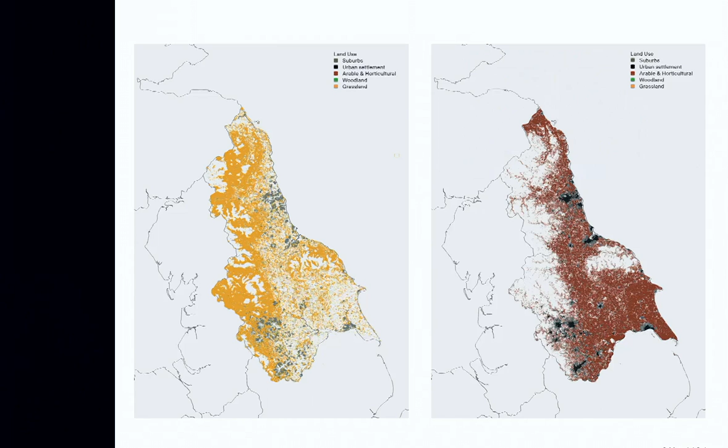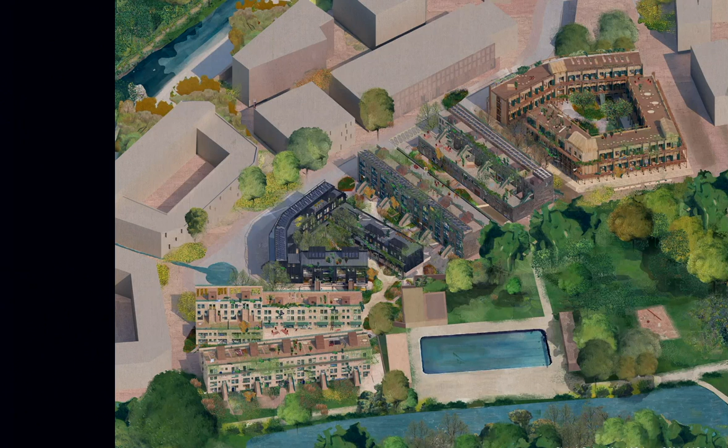We also carry out research, thinking strategically about how these ideas could be applied at scale as we move towards the circular economy, but also more regenerative land management practices. We try to work laterally across different scales, so working on large-scale housing developments and prototypes, down to the kind of one-to-one and the built fragment.

And we do this sort of hands-on work, either as part of our own research or working with our students, looking into the relationship between materials and eco-regions. We also teach across different institutions. We teach architecture, but increasingly we're broadening our remit within education into construction skills, and for this we set up a platform called Make, and through Make we're trying to increase access to an understanding of how to work with natural materials. We recently published a book called Material Reform, which I'll be talking about later on today downstairs.

So I'm going to talk about our work now through three different types of landscapes: through the farmland, principally through design, through forests and thinking about research, and through the wetland, thinking about imagination and education.

So we work a lot with straw. It's very good - it's a stem of cereal crops. It's very versatile, and it sequesters about 42% of its matter as carbon. So when you leave it in the field or use it for bedding or burn it, the carbon dioxide is obviously returned back to the atmosphere. But by taking plant matter from our fields and using it in buildings, and using it to substitute the materials which we have come to think of as the status quo, plant-based buildings can be thought of as kind of carbon batteries.

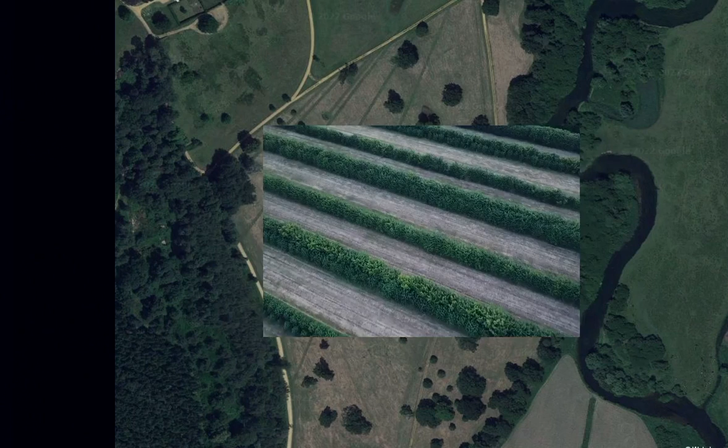We've been learning from farms like this one in Suffolk. They grow in alleyways, so they have rich verges alongside the edges of the crops, and they cultivate population species of grain and diversify and bring resilience to the ecological system by doing that.

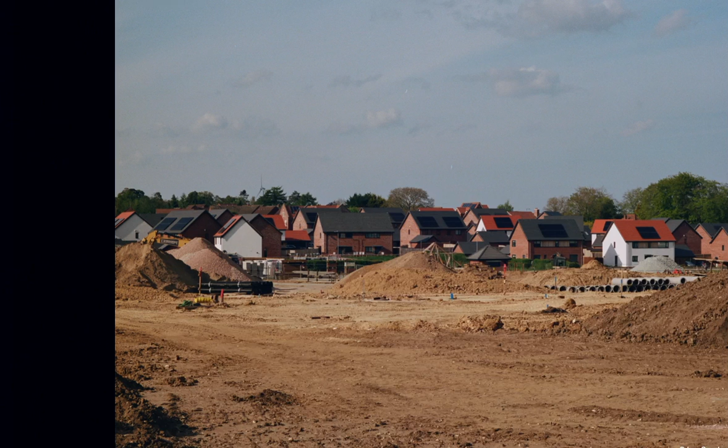A parallel story could also be told about the impact of oil on architecture and the loss of vernacular practices that were inherently low carbon, low impact and bioregional. Essentially, the way we used to work was about gathering up what you had around you, and that has now been substituted by a system where we draw from global, very energy-heavy supply chains.

Contemporary construction materials like steel and reinforced concrete align with the patriarchal masculinity of modernism. They are hard, they are immutable, they are easy to count, and they have the illusion of not needing any care. Inversely, perhaps part of the reason natural materials became denigrated is that they align with the feminine - they are soft and mutable, and they are inviting of careful maintenance and repair.

Natural materials perform in ways that are attuned to human occupation. They have inherent richness, they breathe, and they contain compounds that are antifungal or antimicrobial.

The history of vernacular architecture is a history of thousands of years of technological development, of research, of testing, of regionally and climatically specific adaptation to material systems. But much of this material technology has already been lost, and the knowledge that remains is in the hands of very few people.

So rebuilding a relationship to repair also requires human investment and different sets of relationships to place and territory, and the formation of new cultures.

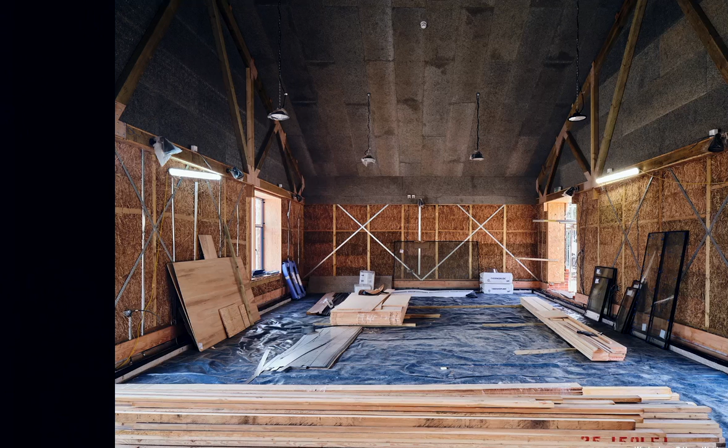The straw bales are very deep, so they create reveals, and we alternate the glazing in these reveals, making places to sit inside and also outside the building. The buildings, the way they're configured, form a series of courtyards, moving from more public facing to more private, depending on the operations of the food growing community.

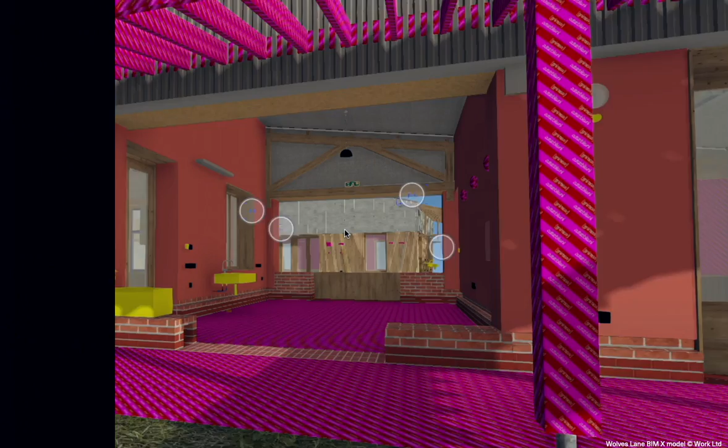Our contractor on the project, Work Limited, took our 3D model of the building and developed a digital twin, detailing down to the fixings, every single plumbing junction, all of the conduit for the wiring - which meant they could order everything with extraordinary precision.

For us, it was an exciting kind of transgression, really, bringing the straw bale into the digital world and trying to work with it in contemporary ways.

The buildings were designed to be a tool for learning and communicating the value of plant-based materials. The project is rooted in principles of social justice, creating spaces to practice and grow and learn for historically marginalised communities in London.

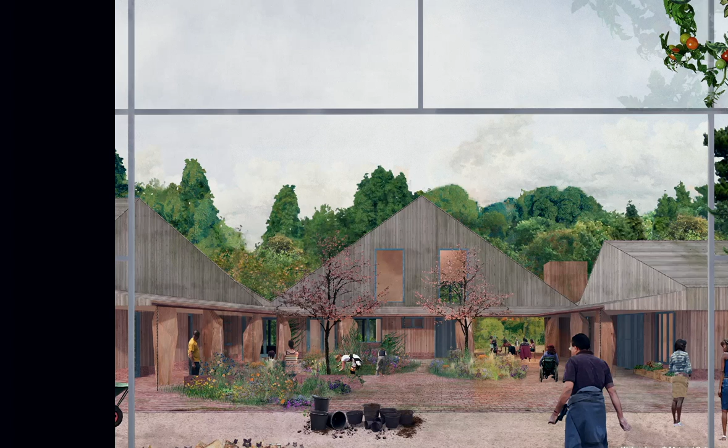Places like Wolves Lane are increasingly important as places from which to build community, knowledge, enterprise and leadership. We developed for the project a participatory construction framework of apprenticeships, skills courses and volunteer sessions, so the building's been host to all sorts of forms of learning all the way through its construction.

Direct contact with and understanding of materials and what they feel like is at the heart of material cultures and how we design and how we build.

On a small farm in Cambridgeshire, our client Steve Barron established an organisation called Margent Farm, where he looked at growing hemp for use in experimental biocomposites and alternatives to plastics. He commissioned us to do a project called Flat House, which is a hemp-based flat pack demonstrator house that could show the versatility of hemp.

The building takes the form of the existing steel barn that was on the site, retaining part of the structure to support a glazed hothouse and a climbing frame for plants. So a new crop of hemp was sown.

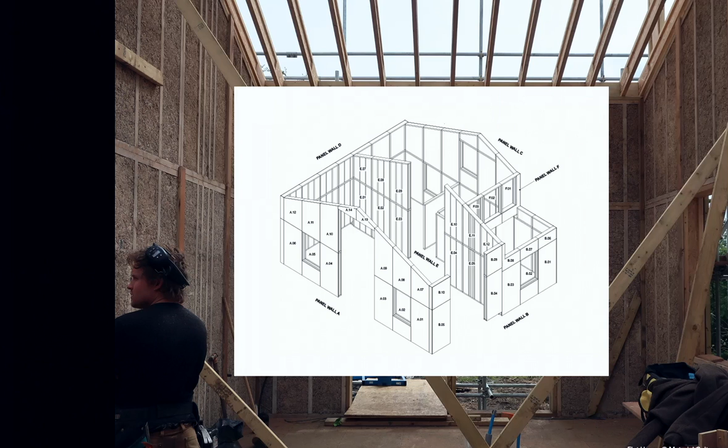The harvested plant has extraordinary benefits for soil because of its very deep tap roots. It was then transported around the UK—first to Yorkshire to separate the fibre from the stem, then to Buckinghamshire where it was combined with lime and cast into panels as hempcrete. We developed the system with Will Stanwix and Oscar Cooper, and the building was erected by our long-term collaborator Henry Stringer.

Alongside the hempcrete inside the building, a cladding material was developed specially for the project, combining fibre from the hemp plant with a sugar-based bioresin to make a corrugated rain screen cladding, which looks much like the one you see across most agricultural buildings.

Inside, the spaces shift between scales, working between highly intimate ones and large, open, spacious living areas. Working with natural materials in a direct way allows the materials to be used to hold the space and give it character.

In designing, we have to admit we constantly navigate the compromises and contradictions of working within highly complex and industrialised supply chains. It's important for us that you see this in the building, and that the material choices we make are evident.

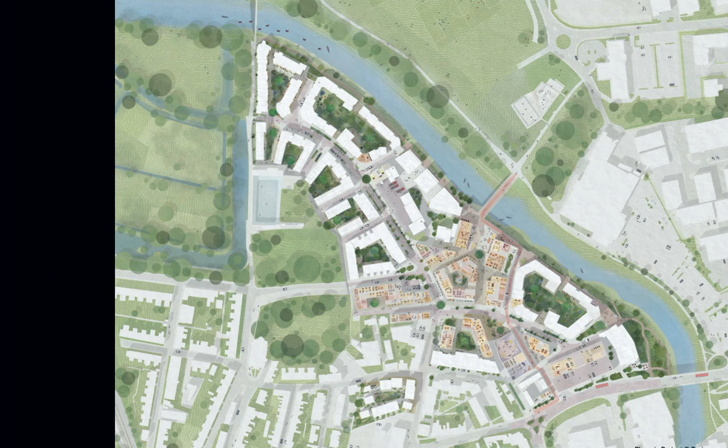More recently, we've been working to scale up the principles from Flat House on an ex-industrial site in Sussex on the south coast of the UK. We've been working with a developer called Human Nature to deliver part of a 700-home mixed-use development.

We've been contributing to the broader material and construction strategy, and also developing the design for 70 homes, which form a dense urban configuration arranged to create shared courtyards along pedestrianised streets.

The unit typologies are varied and designed to be generous, but are mostly based on the principles of the traditional terraced house found across the UK.

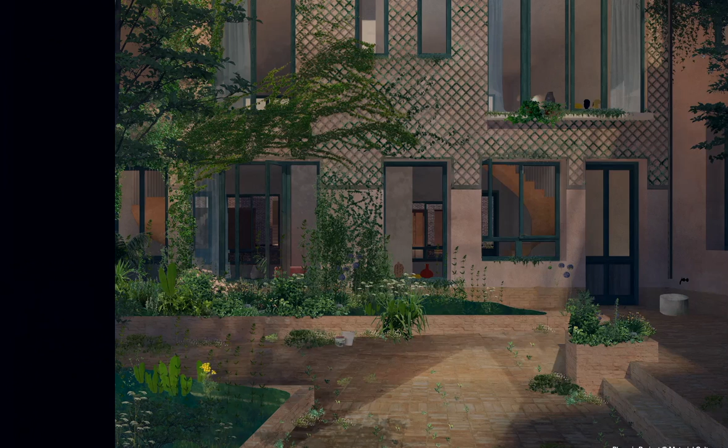We think the project demonstrates what's possible once you start working at a larger scale, presenting the opportunity to build a genuine alliance between sectors, working directly with foresters and farmers to establish supply chains. Large-scale developments are critical to producing scales of efficiency that reduce the cost of materials, but can also fast-track supply chain development.

So, moving into the forest: for our structures, we look to timber, and then to the woodlands in which trees are grown.

Woodlands are a critical habitat for biodiversity and ecosystem restoration, but they're also intertwined with a history, particularly in the UK, of our common lands—ones we've largely lost access to. We used to be able to source multiple materials from woodlands, generating different income streams. But today, most woodlands are privately owned, we have limited access to them, and they're actually in very poor ecological health.

Converting agricultural land to woodland is increasingly talked of, but it can also be seen as the beginning of offshoring deforestation—plantation development in one place leading to deforestation and carbon costs elsewhere. There's a critical relationship between farming, deforestation, and woodland creation, and as we advocate for change in how we build, it's important to remember the increasing tensions in how we use our land.

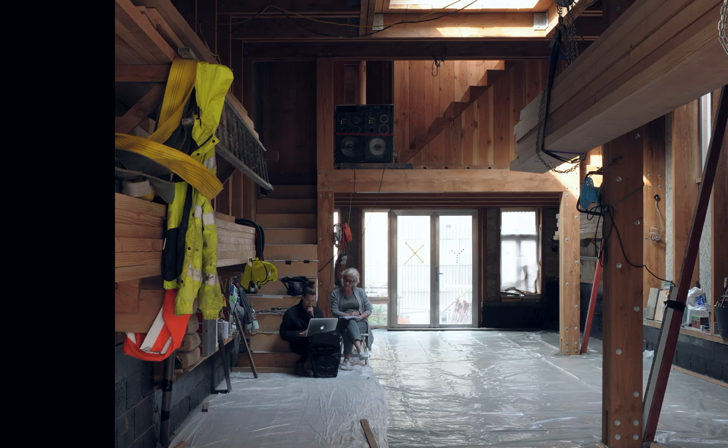As a self-build, the project is in many ways still ongoing. It's a story of homeowner agency, of continued care and maintenance and renewal.

It's a monolithic 3-storey timber and hempcrete building, and it has a textiles workshop and 2 apartments in it, and a raised external courtyard. It's very flexible and can operate as a series of interdependent or independent units.

In this project, we cast the hempcrete in situ, so you get shuttered board lift lines like you do with fair-face concrete, but much warmer and softer.

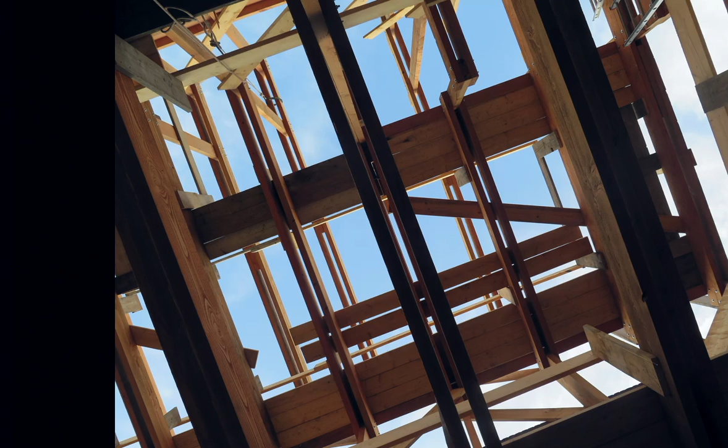The design approach in this project was intended to use carbon sequestering materials in ways which used simple and robust detailing to maximum effect. So actually the frame, the floors, the skirting boards, the whole project was made with one single section of Douglas fir timber of the same size, all sourced from one mill in Salisbury.

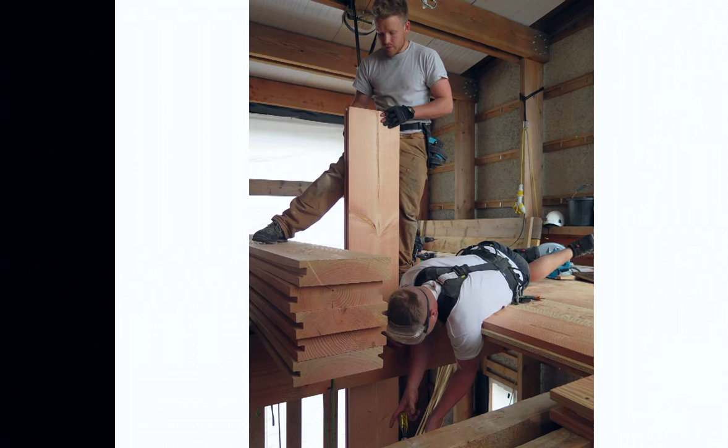And we oversized the sections to allow for charring, so we didn't need to use intumescent coatings to protect the building from fire. And because the section size is so large, we had a very wide portal frame, about 1.2 metre column centres, and then the floorboard spanned about 1 metre.

But then ultimately that means the primary materials perform multiple functions. So they act structurally, but they also provide acoustic insulation, thermal insulation, fire resistance between floors. And so we needed to use less alternate materials.

We have, for example, no soffit. And the building celebrates the materials from which it's made, giving it a richness of character.

And that the primary materials are close at hand also means that it's easy to adapt them, to maintain them, and to rework them. And equally, because it's so simple to put together, it's simple to take apart.

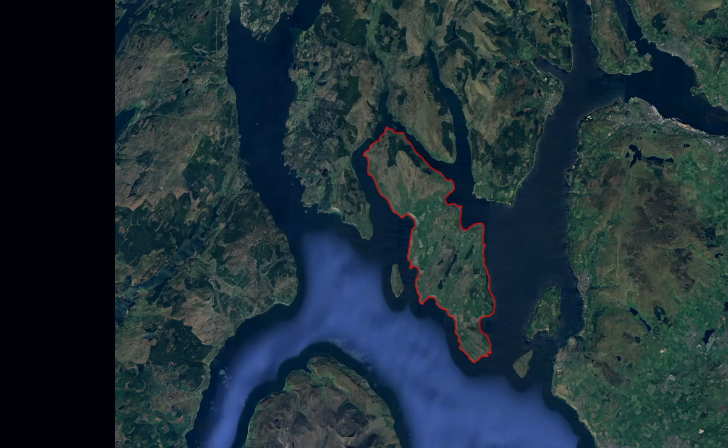And whilst we found that actually there are quite good supply chains for timber around the south of the UK, around London, on this project we've been working on more recently in the Isle of Bute in Scotland, the conditions for milling and sourcing timber are very different, although actually Scotland holds most of the UK's timber stocks.

Bute itself is now entirely a farming landscape. It used to have a very precious temperate ecosystem, a rainforest on most of the island, but you can see just about what's left of it is the kind of shadow on the northern corner of the island.

We've been working on a site surrounded fully by industrial farming to refurbish an old steading building, which has been left derelict for decades, the steading being the kind of vernacular farm typology you get in this area.

When we started the project, the first thing we had to do was take off the existing timber structure. The slates on the roof had fallen in and the timber was rotting.

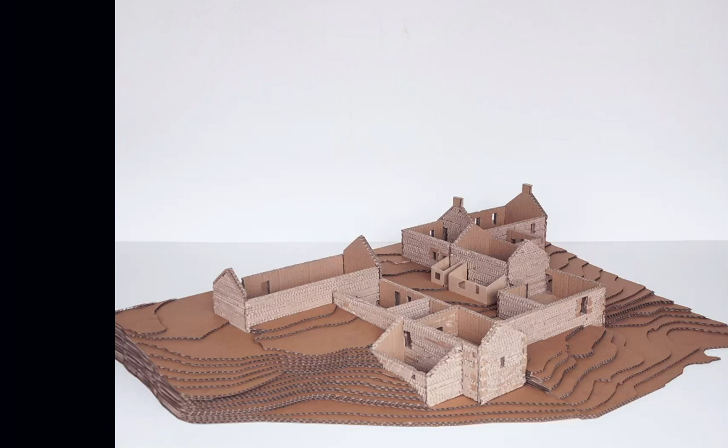What this left us with was a series of very wet stone walls, which are actually quite hard to work with if you're trying to introduce bio-based materials. The first thing we had to do was dry them out fully so they could then be lime rendered again to protect them from the elements, because it's very close to the sea.

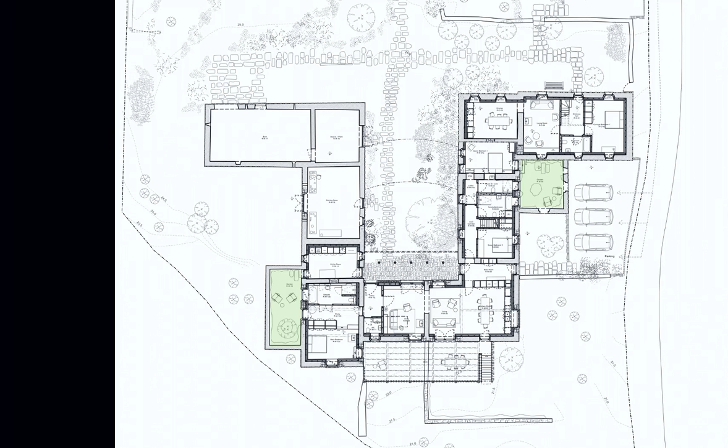Ultimately, the plan we've been working with is very simple, creating two independent dwellings, keeping some of the stone rooms unroofed as kind of gardens, which are appendages to the house, making spaces sheltered from the very strong offshore winds.

We worked with a landscape architect called Jane L. Gibbons, who designed the landscape around the house using the temperate rainforest plants native to the island. And the porch is a series of timber columns, which carry oversized slate eaves.

We lifted the eastern wing of the building to introduce a new mirrored gable, which gives the kitchen and living room very generous head height.

Where we can, we're working with the existing stone on site to rebuild the walls. This has been an incredibly slow process, I have to say - very interesting, but very slow.

We have an excellent building surveyor, called Kinley Laidlaw, and his understanding of historic buildings and consideration of how the work is planned has extended to visiting all the beaches on the island to find the exact beach where the shells come from that were used to make the original lime mortars, which is the traditional process used before.

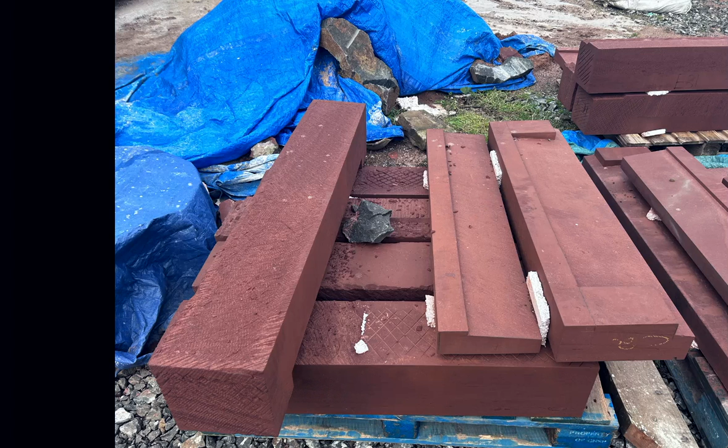But he also works to plan how the masonry work happens on site, which has been really important learning for us, so that the work for the masons isn't repetitive or dull. He breaks up the tasks and does a plan of work, which means you cycle through alternate tasks rather than doing all the dressing in one day.

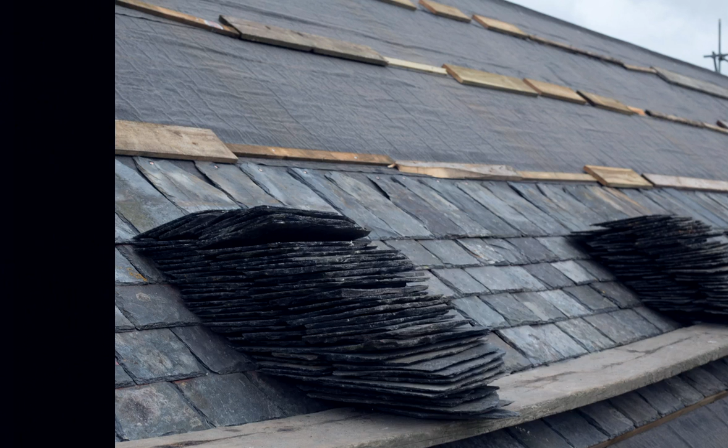Our roofer, Hector Whitelaw, has been reusing the old slates to rebuild a new roof. And where we've been bringing in new materials, we use wood fibre insulation, wood wall boards, and clay plasters.

Much like the many aristocratic estates across the UK, the private woodlands of the estate of the Marquis of Bute - the kind of landed gentry of the island - are standing still today, not because they're native ecosystems, but quite the opposite. They are a portrait of a colonial history, and host a series of cultivated specimen trees.

We've been working with the estate managers on the island. There's one sawmill trying to resist the pull to import timber from much further away on the mainland to build a new roof. There's also plantation woodland on the island.

There's also storm-managed felling, but most of the plantation woodland is actually used for firewood. And they have a very small management team at the mill.

They're very nice, very sweet and very friendly, but they have no in-house structural grading capacity. This is a portrait of what milling is like in the UK, actually - it's been fully centralised into large mills that are quite far apart.

So for this project, our engineer trained specifically in the capacity to visually grade the timber so that we could work with the trees that were nearby.

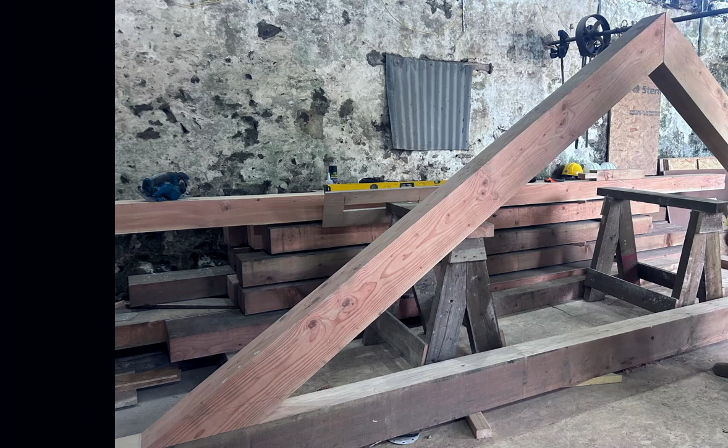But on a small island like Bute, it's massively depleted in its industry and population. It has a population of about 7,000 people. Supporting the kind of growing industries is a critical way of moving towards more sustainable supply chains.

But as I've said, it involves very complex processes which, without the support from policy, are very expensive. It also involves us thinking differently about the role of the architect in the future.

And finally, I'm just going to talk very quickly. My last forest project is one we've been working on in Yorkshire for a long time with the Forestry Commission and Forestry England.

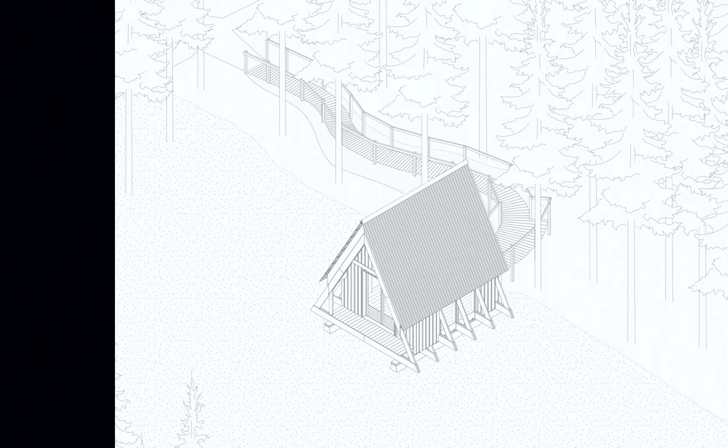Working with a group of students from Central St Martin's School of Architecture, 30 master's students, to think about the construction process of a timber building as a pedagogic tool.

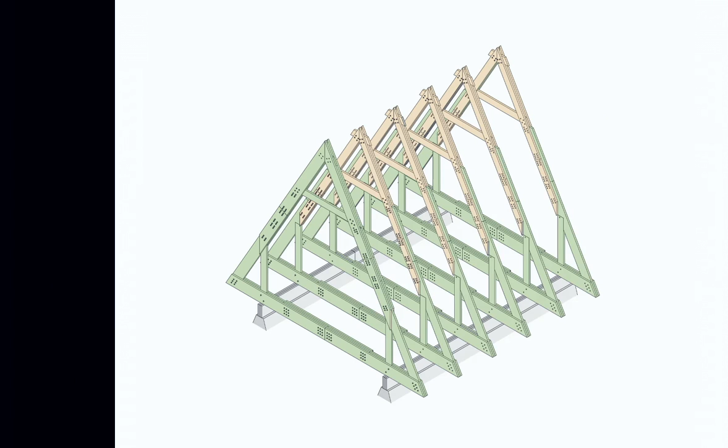In this project we've been thinking specifically about the limitations of British forestry. We designed a building which works with two species of timber, ash and larch, which today are affected by pandemics, exacerbated by global warming. You can see them in green and orange, showing how you mix timber species in a structure, not just as a whole but within a single structural component.

And then working within the limits of what you can actually grow within British woodland, so we have shorter trees, shorter lengths of timber section. The project as a whole is a kind of portrait of things we make today from British woodlands in Europe, but also many materials which we don't make in the UK, like wood fibre insulation, but could, with a growing manufacturing base, make ourselves.

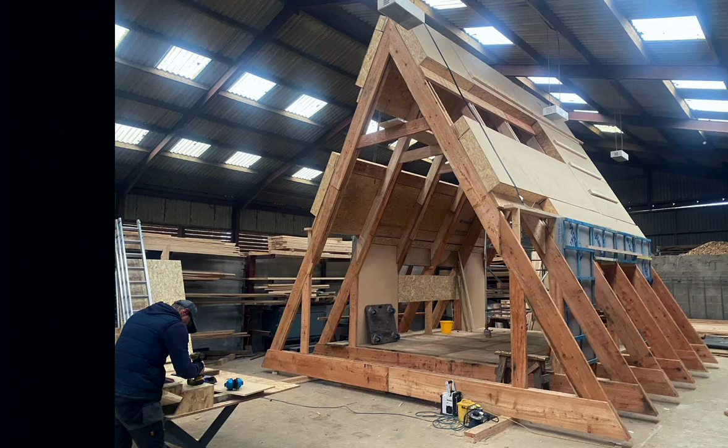The project was prefabricated in very small workshops in London by a team of about 15 students, and then it was dry fit in our contractor's workshops in Yorkshire, called Yorkshire Oak, and it's ready to be erected on site in about two weeks.

The final landscape I'm going to talk about today is the wetland, because we've recently started looking at wetlands as a landscape of potential, and also a site for imagination and a springboard for conversations about what a future regenerative landscape might look like.

Swamps, marshes, fens and wetlands were historically identified as areas of mystery, places of threat. They were wastelands, articulated as places with no inherent benefit to human populations. They are obviously critical ecosystems, stopovers for migrating birds, carbon sinks, and buffers against sea flooding. But they were considered landscapes of untamed nature that needed to be transformed into farming landscape, productive grain fields that could be controlled.

A common misconception is that civilization started in arid settings which were then irrigated to grow crops. But actually, human civilizations first settled in wetlands. They have very little written record because everything was perishable, and it was an oral culture. Equally, the building materials perished, so there's not a wealth of archaeological record about this. Ultimately, those civilizations have been claimed by water and soil and time, and until recently this has remained invisible.

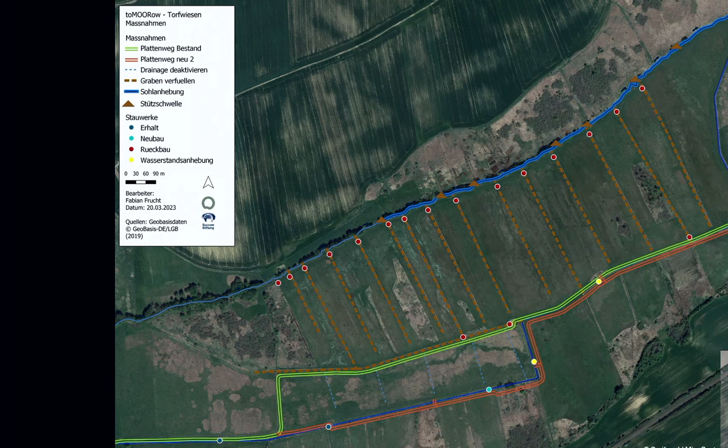Because it's important to think that when we flood a wetland, ultimately the agricultural practices over the last decades have to be replaced, and so there are communities there who've been working and their livelihoods are being threatened by these processes.

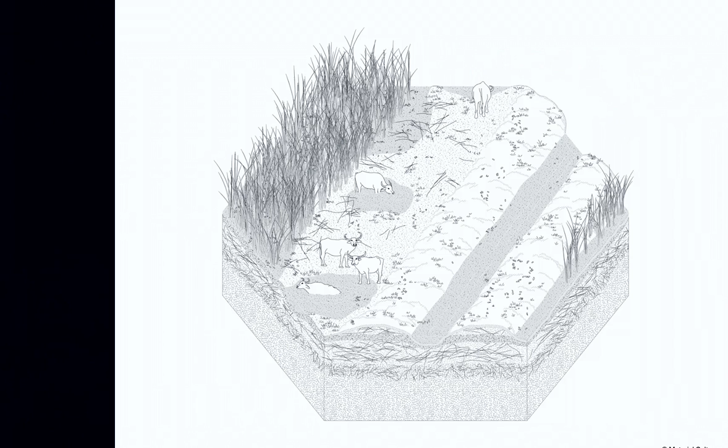But there's a lot of potential in re-wetting and rewilding wetlands for conservation and production. What's critically important is you can have a coexistence of landscape regeneration and biodiversity restoration, material production and food production. So where there was vegetable growing and grazing animals, now there are farmed water buffalo who are quite happy to live in a wetland and have the right kind of feet.

We've been working with an organisation called Bauhaus Earth to look at how reeds and other paludiculture crops from these landscapes could be cultivated to the benefit of the farmer, but also of the landscape. So we've been working with manufacturers and farmers and conservationists to understand how this supply chain could grow and scale.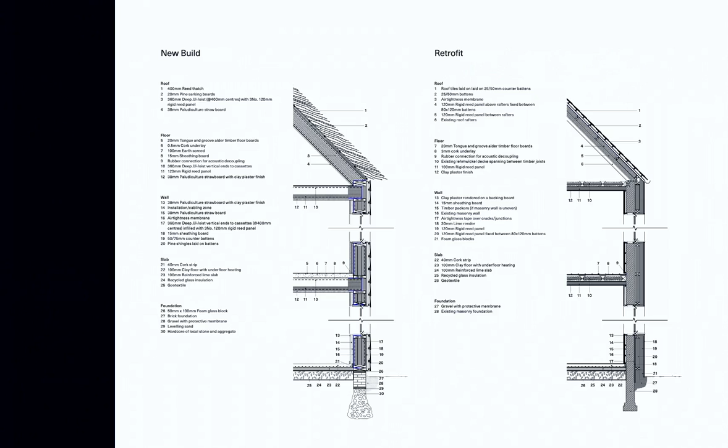By looking at the volumes of materials that could be sustainably harvested from the site, we also began to understand the potential for a material supply chain that could feed both retrofit and new build. So very simply, we quantify the amount of materials you need to make a new house or to retrofit an old one under the German building regulations using materials that could be harvested from our site.

And on sites like ours, which is 80 hectares, if you leave 10% fully to biodiversity, and the rest is sustainably harvested, you could essentially grow 60 houses a year.

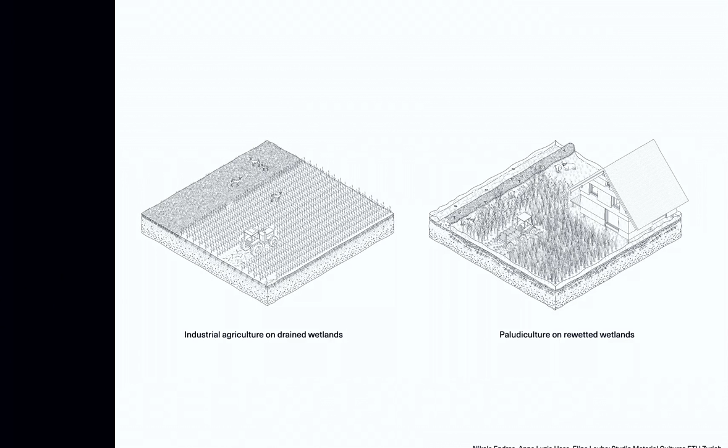We've been exploring the potential of wetlands through different narratives, through ways of organising, methods of production, in the office, but also in the academic research we do with our students. This teaching is really integral to our practice, we learn as much as we hope our students learn with us.

And the focus of our teaching work is not generally programmatic. We develop building systems which could be applied in numerous ways, learning from the land, but also learning from the people who work the land.

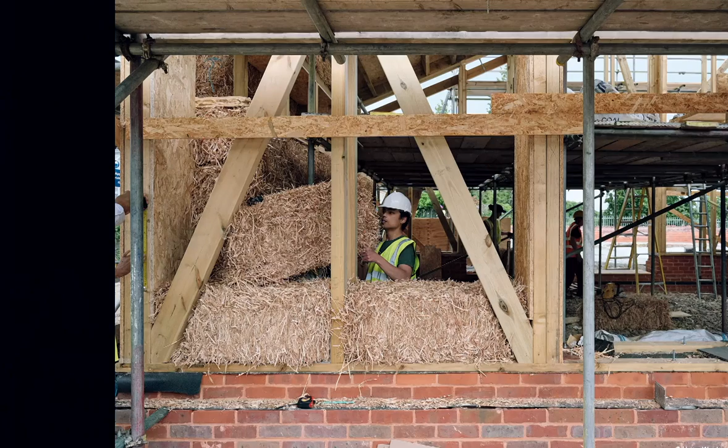I guess the critical reason that we're interested in education is that our industry today doesn't have the skills to use these materials because they're not very well understood and they're not taught. So the construction industry has also not been good for the people who work in it, and how we respect labour and the body is tied to the use of fewer toxic materials.

We're interested in uncovering old skills and developing new ones. Through our platform, Make, we've been teaching people how to build with earth and straw, and reed and hempcrete and lime, operating from various construction sites across London and the UK.

Together with practitioners and workshop participants, we've been developing a model for a different sort of construction training, one that's more engaging and participatory and reciprocal, because we believe that through experimentation and play, we can develop new material technologies together.

We believe that in order to make meaningful change in the construction industry, we have to accept that there aren't any easy answers, and that all construction practices cause harm and all require compromise. But to move forward, we think architects have to back sources and supply chains and draw on the knowledge and experience we have from different disciplines to incrementally figure out which of the compromises are acceptable and in which the harm outweighs the good.

Thank you very much.